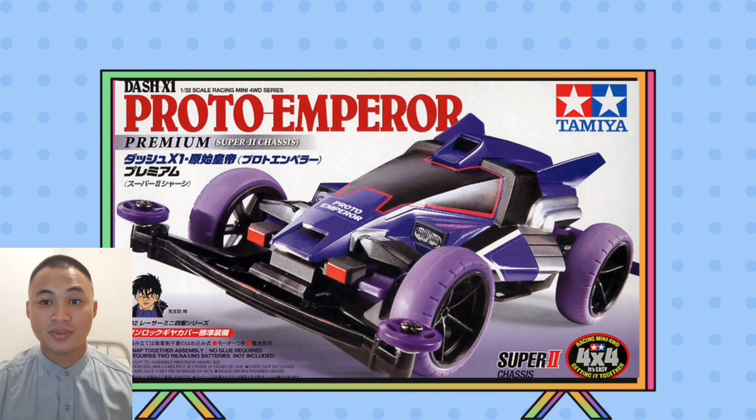For your reference, this represents the final design of our project model. The content of this slide presents a prototype model that was undergoing research and development at that time, before official release in 2009.

In this project, our group will collaborate on the product development of mechanical devices, focusing on the following objectives. First, acquiring fundamental knowledge and technical skill in 3D solid modeling using industry-proven 3D mechanical CAD software to enhance our cognitive capabilities.

Second, engaging in hands-on project exercises and learning best practice methods to improve our skill in assembly, drafting, and structural analysis as part of the course. Third, collaboratively contributing to the development and fabrication of a more user-friendly and affordable racing mini four-wheel drive.

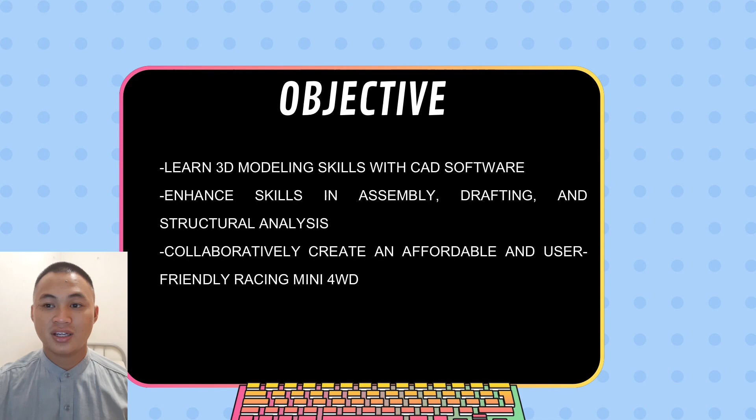The main point is that the Racing Mini 4-Wheel Drive project aims to develop and refine high-performance miniature racing cars by focusing on chassis innovation, motor and power systems, aerodynamics and body design, tire and suspension optimization, and sustainability considerations, in order to provide a compelling and competitive racing experience for enthusiasts.

Next is the problem statement. It is crucial to acknowledge and tackle this obstacle for the progression of the pastime, fostering a more satisfying and competitive ambience. Our objective is to enrich the Racing Mini 4-Wheel Drive experience by methodically addressing this issue, making it more accessible, enjoyable, and environmentally responsible.

Next is a short brief about our group project. The Racing Mini 4-Wheel Drive is a miniature 4-wheel drive racing car that has gained global popularity among hobbyists and racing fans. It offers an engaging racing experience with its compact size, customizable features, and evolution in design and technology, making it a symbol of creativity and community engagement in the racing circuit.

Next, when we want to do the project, of course we have our vision and mission. For my group, our mission is to discuss features and some problems focused on this project to expect the best achievement result of the project. And our vision is to understand the process in making a good Tamiya model.

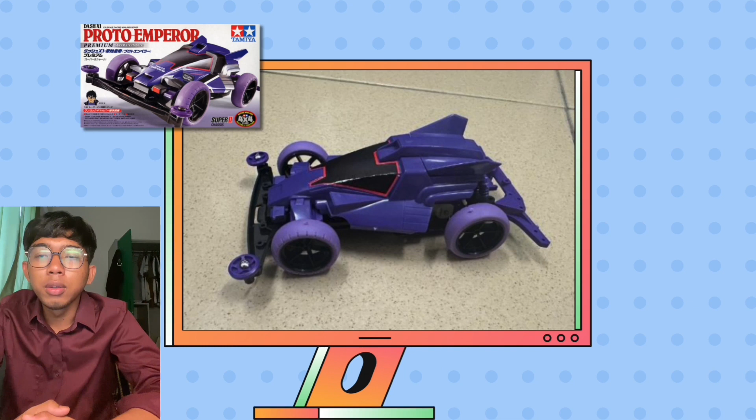Look at this slide. This slide shows the project we are doing. Look at the picture - that's our project after adding all the parts that have been given.

Next we go to the design process. This is the method we use when doing this project. When we want to make the part, this is the method we use: line, circle, rectangle, plane, dimension, trim, extrude, loft, extrude cut, thread, fillet, mirror, circle pattern, shell, 3 point arc, revolve, and combine.

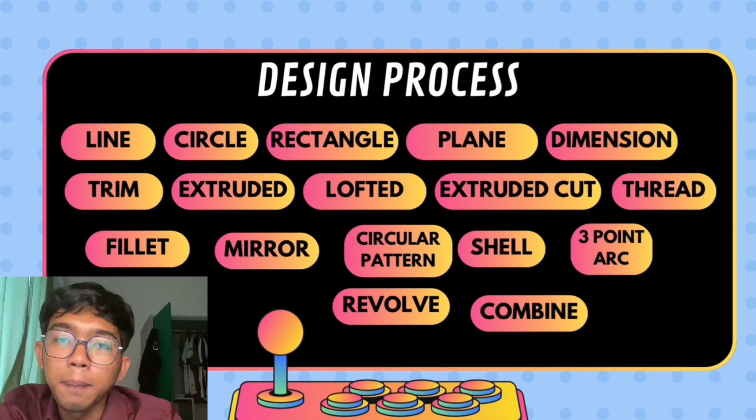It's all that we use to make the part. Next, we go into the flowchart process.

First, project management, then prototype design, review conceptual design, check compliance of all parts and their availability, and then final design approval. After final design is approved, we start the project.

First is disassemble part. After disassembling the part, we measure all the parts using a vernier caliper and ruler mostly. Then after measuring, we sketch each part on SolidWorks.

After sketching, we assemble all the parts in assembly. Then after assembly, we make the drawing part.

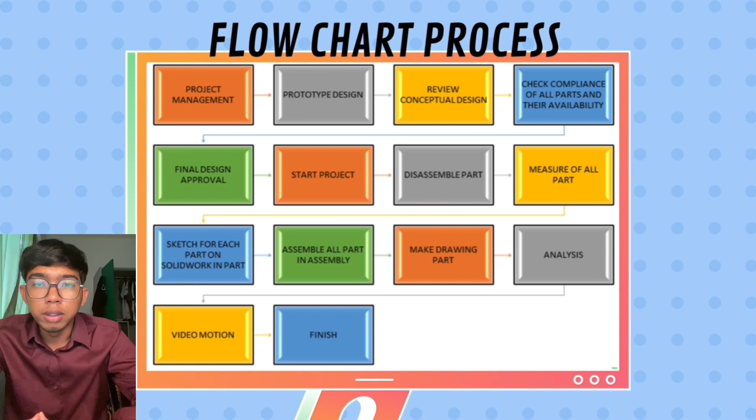After all done, we do the analysis. After settling the analysis, lastly we create the video motion.

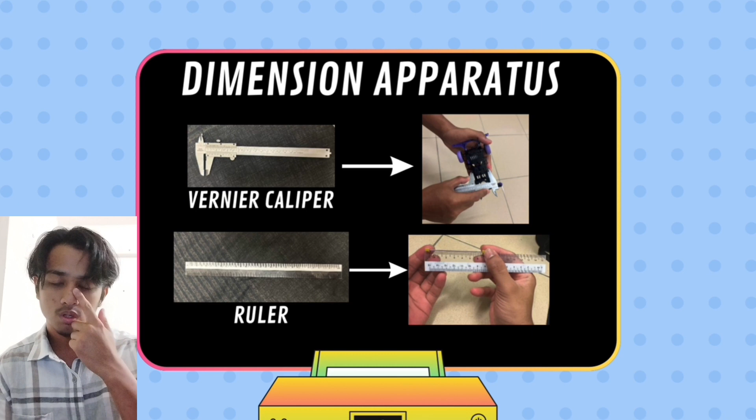First, about dimension apparatus. For this project, we only use two tools to measure the part. First, we use a vernier caliper and ruler. For the vernier caliper, we use it to measure large parts such as the body and the chassis. For small parts such as the gear, roller, and tire, we use a ruler to easily take the reading note.

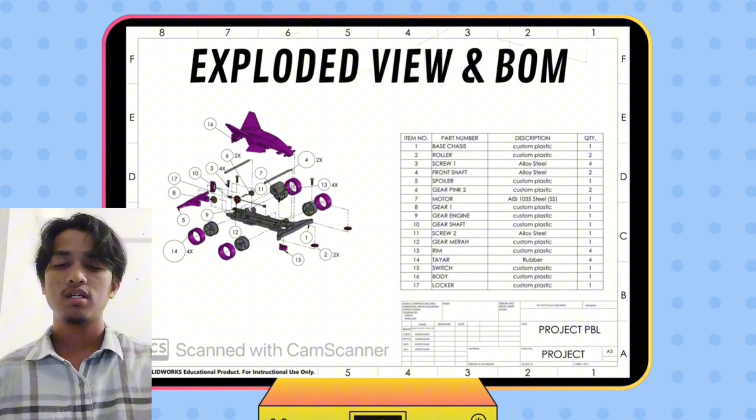For assembly view, we create a complex part of the model such as body, chassis, gear, roller, and spoiler. Then we combine them to get the final product. By referring to the slide, this is the final view of the model that we combine all of them to get this view.

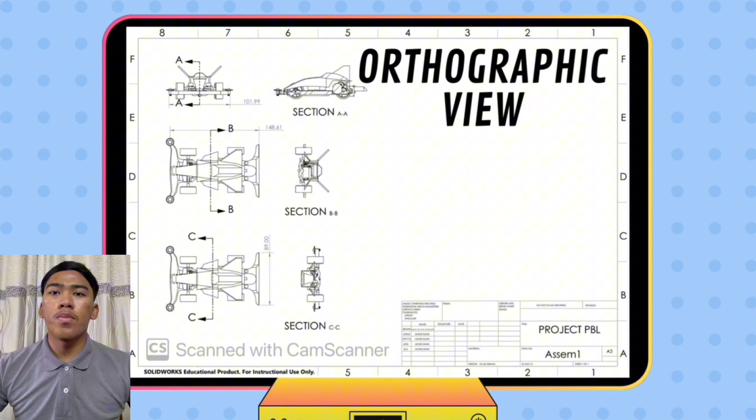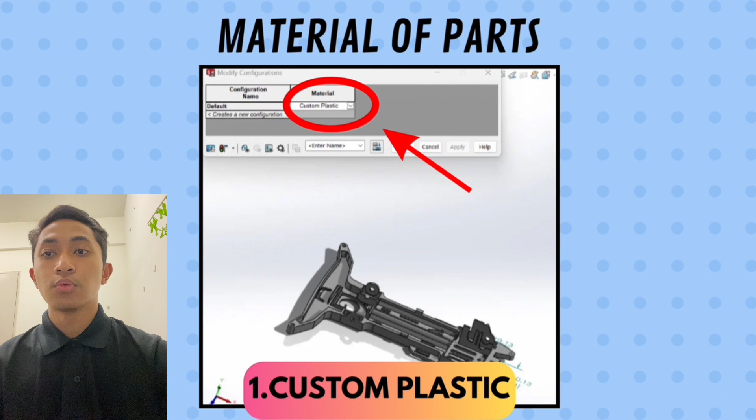The most parts of materials used in this Tamiya model car are: first, we have custom plastics, second, we have AISI 1035 steel, third, we have alloy steel, and last, we have rubber that's only used in the tire part.

So I will continue my slide, and the slide shows the simulation analysis, which is, I choose the spoiler, body, and chassis parts.

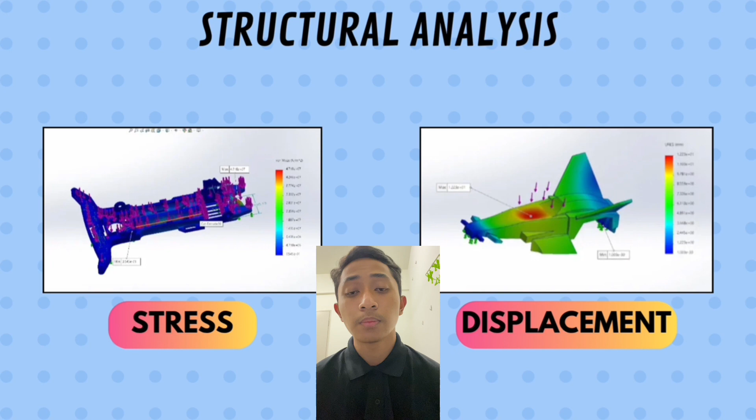The places where red color appears are the highest stress, and the lowest stress is the blue color. So these are the results, which are stress, displacement, strain, and factor of safety for the base chassis, body, and spoiler parts. And this is the exploded animation that we use: rotate model, explode, and collapse for 40 seconds.

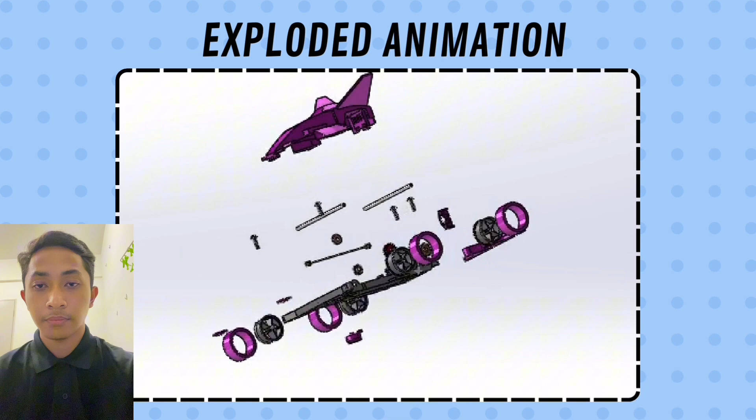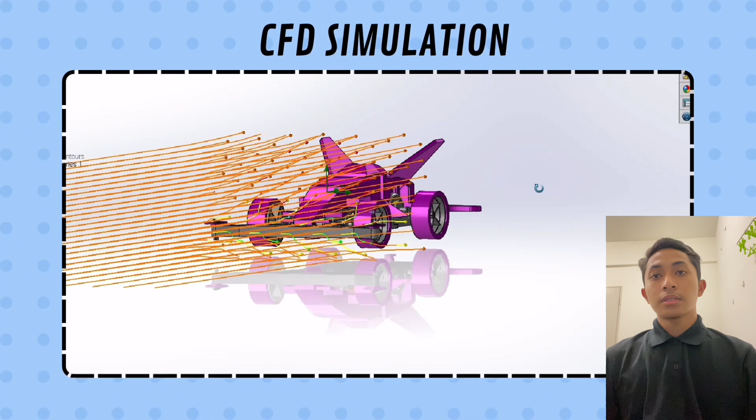So next, this is the computational fluid dynamic simulation, or CFD. In this simulation, we choose the 3D simulation computational domain. For the fluid type, in the fluid subdomain, we took the air gases and set the flow parameters at 6.07 meters per second.

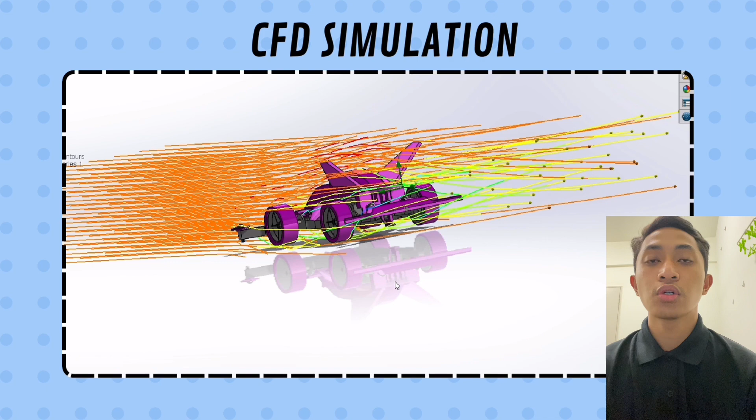For the cut plot, we choose the front plane as the selection. For the flow trajectories, we choose the right plane as the starting point. And for the appearance, we choose lines with arrows, and the number of arrows is 100.